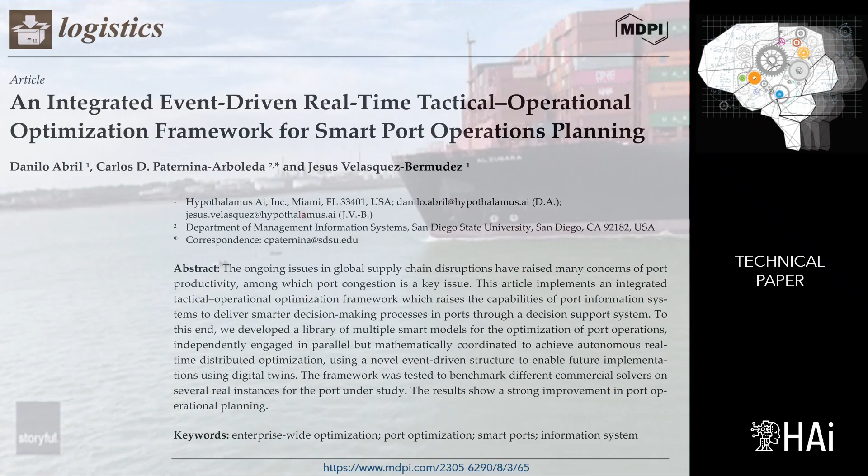The White Paper, Optimización de operaciones en puertos, contains an overview of this type of project. And the paper, An integrated event-driven real-time tactical operational optimization framework for smart port operations planning, presents an academic publication of the work.

HAi has developed the HAi Port System to optimize the decisions of companies related to the port sector and the logistics operations that must be faced: Port Operation Modeling Framework, Ports Advanced Analytics.

Port decision makers today face the problem of exploring ways to increase port capacity, which is influenced by the continued growth in the number of containers entering and leaving the port, the steady increase in the size of ships, as well as many other previously unforeseen factors.

Therefore, professionals as well as academics have become interested in port capacity management and the use of advanced analytics to support their decision-making processes. Applications can be grouped into strategic planning, business planning, operations planning, real-time scheduling of operations, productivity analysis, and asset maintenance scheduling.

Challenges faced: the port receives multiple weekly services that must be assigned to one terminal. The combinatorics of allocation possibilities is on the order of trillions of possible combinations. Before the project, the assignment was carried out manually, considering the characteristics of the ships, the itineraries of the services, and the restrictions of the docks and cranes existing in each terminal.

This assignment was made without considering optimality criteria; therefore, there was no guarantee that the established allocation would be optimal. If the terminal planner took a minute to evaluate each alternative, it was estimated that it would take millions of years to ensure an optimal response, obtained from a comprehensive enumeration.

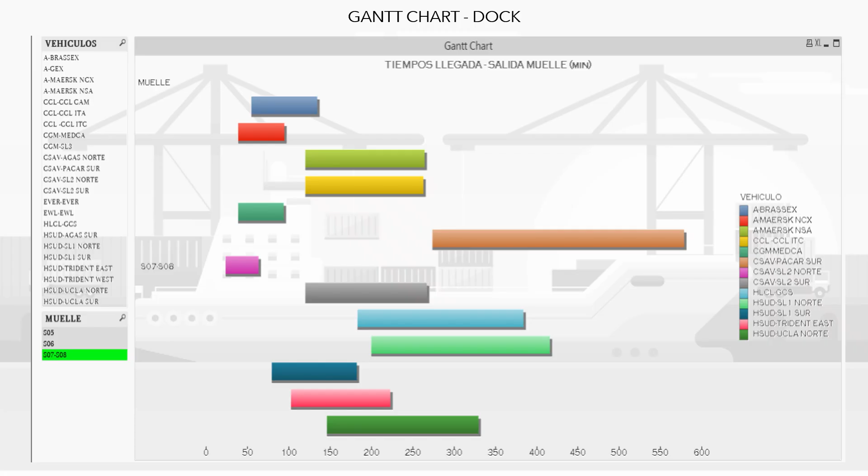The Gantt chart presents a detailed schedule, by event, continuous time, of the assignment of vessels to the docks. A port is conceived as consisting of one or multiple terminals to serve ships of different types of transport: bulk products, container ships, vehicle carriers, and cruise ships.

The main parameters that characterize the operation of a terminal are berthing lines, characterized by the distance, draft and load they can support, the storage capacity in different types of sites, yards, warehouses, tanks, silos, and the type of products that can be stored at each storage site.

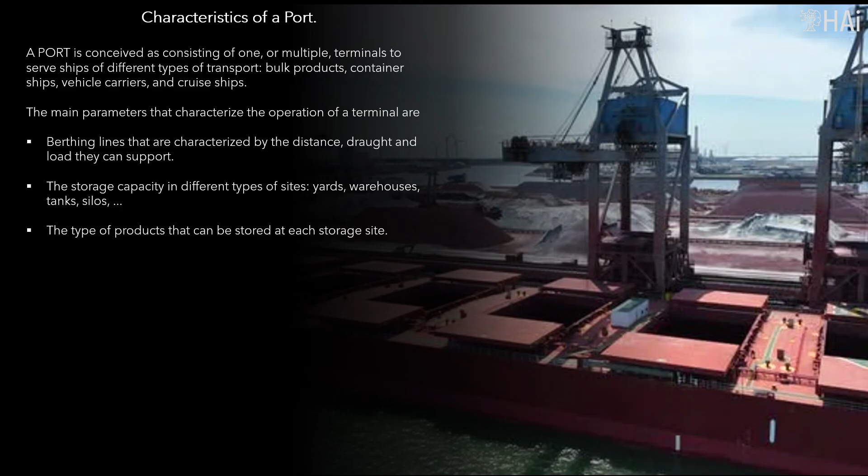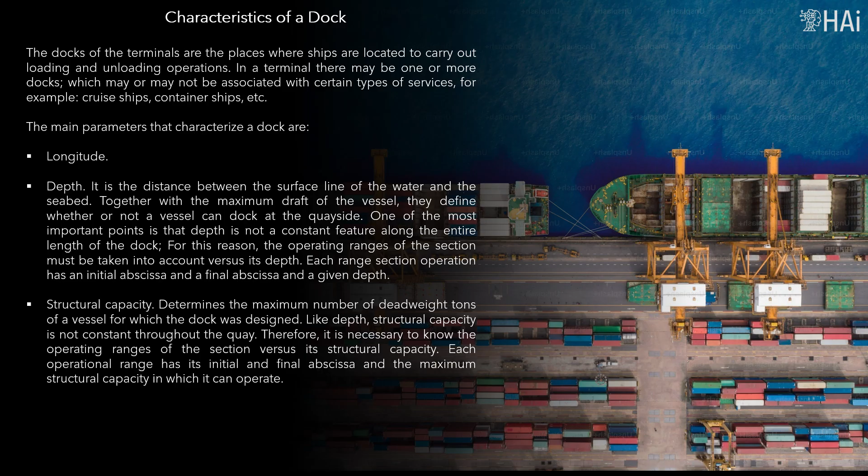In a terminal there may be one or more docks, which may or may not be associated with certain types of services, for example cruise ships, container ships, etc. The main parameters that characterize a dock are longitude, depth, and structural capacity.

A terminal is made up of multiple docks. The image shows a terminal that has two docks. Each pier can be made up of several berths, which can be of variable length. Therefore, the dock must be modeled so that the length of the berthing assignment is dynamic.

There is an operational restriction on the distance that must separate the ship from neighboring ships, and the start or end point of the berthing line. These separations can be seen in the figure.

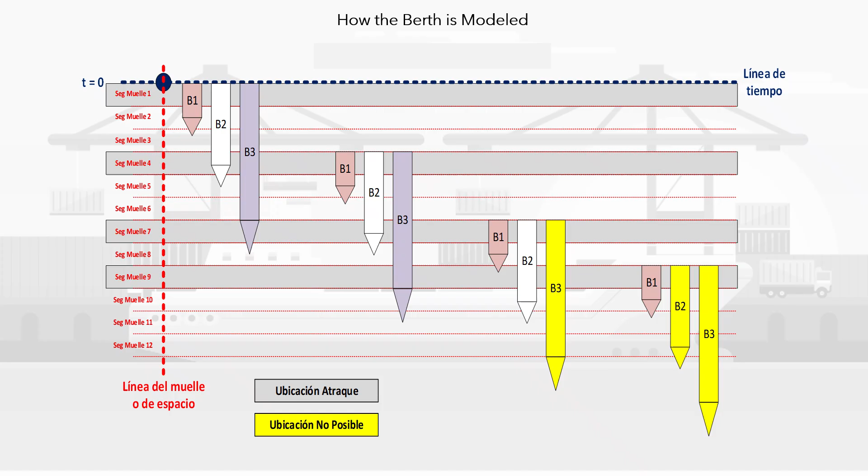The quay will be modeled using the quay segment concept, defined as a range of the quay where the depth and maximum structural capacity can be considered constant.

Terminal docks do not necessarily represent a physical or operational division; it is along the docking line, considered continuous, that ships are placed. The berthing line is characterized by its physical conditions, structural capacity, and depth, which must be considered for the assignment of a ship to a position on the line.

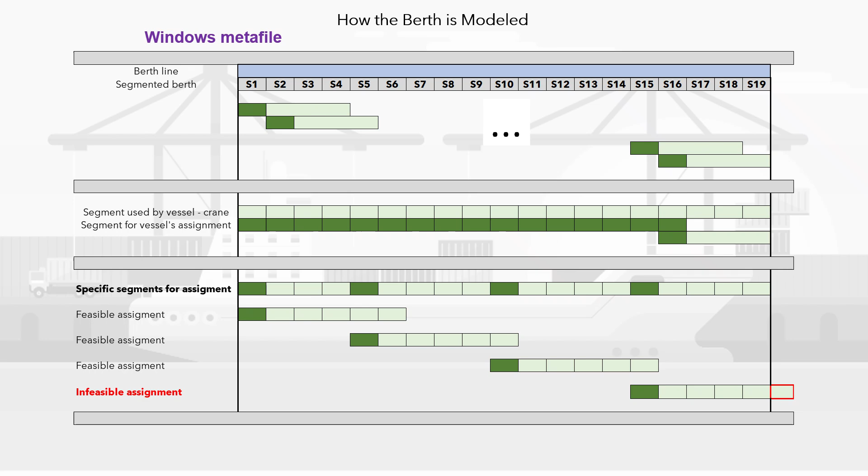The physical conditions of the berthing line are not constant along its length. For this reason, the dock must be segmented to define ranges where these characteristics are considered equal, determining a dock segment, or quay. The discretization of the berthing line, for example every 10 meters, must be defined jointly between the user and the mathematical modeler.

The cranes are responsible for the loading and unloading operation between the ship and the dock floor, for products such as containers and vehicles. Normally a port has multiple types of cranes, among which stand out mobile cranes and gantry cranes. The main features of the cranes are crane type, lifting height, seaside reach, average productivity, movements per hour, and maximum availability.

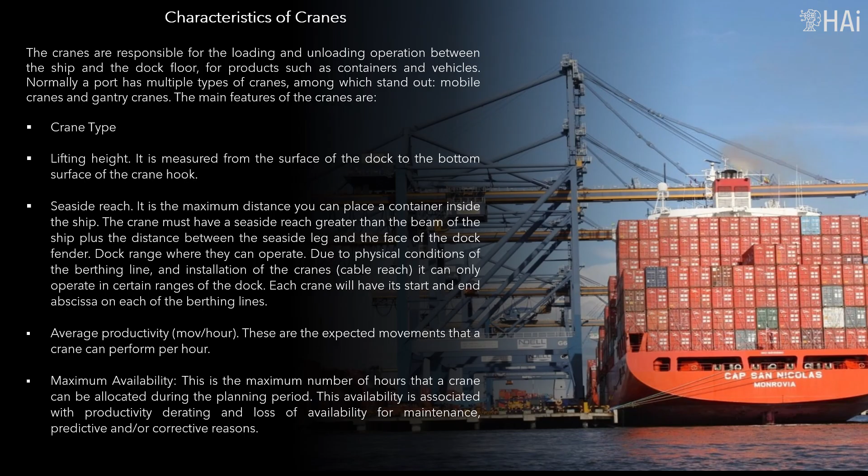Assignment of crane to model services and handling of containers. Its purpose is to produce the following specific items: a detailed schedule of the assignment of cranes to services, and container management considering their destinations.

The dock cranes are in the coastal or operational area. The transportation area supports vehicle movements, cranes, trucks and/or trains. The containers are stacked in the container yard.

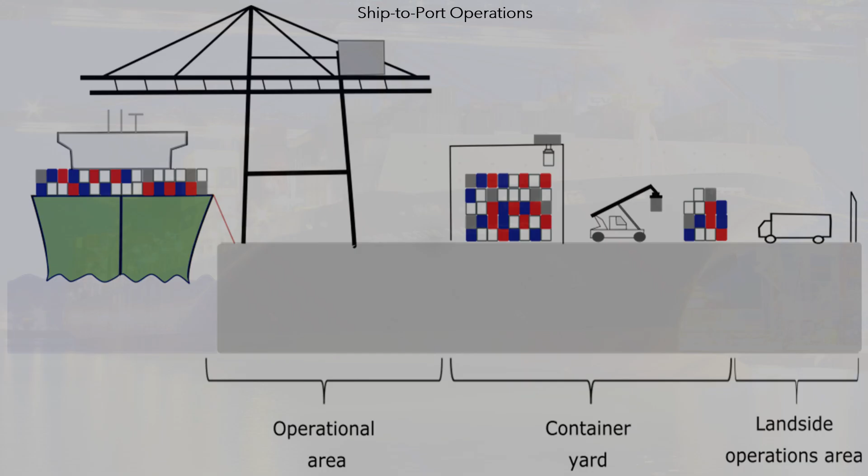Assignment of gantry cranes and mobile cranes to services. The aim is to optimize the loading and unloading of vessels and maximize the use of quay cranes. The model considers crane sequencing, choice of gantry cranes, restriction of clearance between consecutive cranes, sequence and non-overlap constraints, sharing a crane between two ships, and movement limitations for gantry cranes.

Allocation of labor to port activities. The goal is to define the HR schedule, minimizing the number of employees hired and reducing the cost of payroll. Scheduling is carried out considering the prior planning of port operations.

Assignment of containers and vehicles to storage yards. This process is carried out in two stages. Stage 1, macro yard planning. The goal is to minimize congestion in the yard for loading and unloading. The model considers optimization based on the concept of clusters, relationship to future vessel allocation, and limitations of yard cranes.

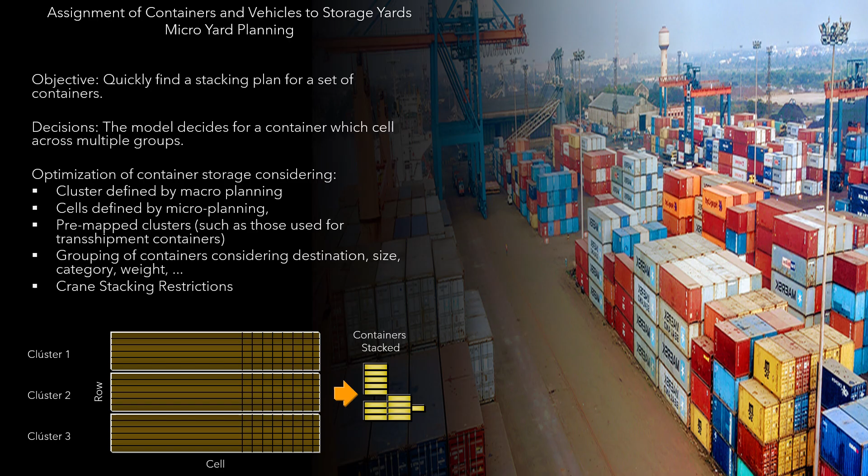Container and vehicle movements between ships and berths. The goal is to assign the container to the crane as close as possible. The constraints of the model are: handling the loading sequence between the shipyard and the vessel, location of containers and vehicles considering planned future movements, restrictions on cranes, clusters, and overweight and stability on ships.

Real-time decisions are: what slot on the boat, and which cluster to pick up in the yard? Below, we present in detail the movements of containers between ships and berths. The dock cranes are in the coastal area. The transportation area supports vehicle movements, cranes, trucks and/or trains.

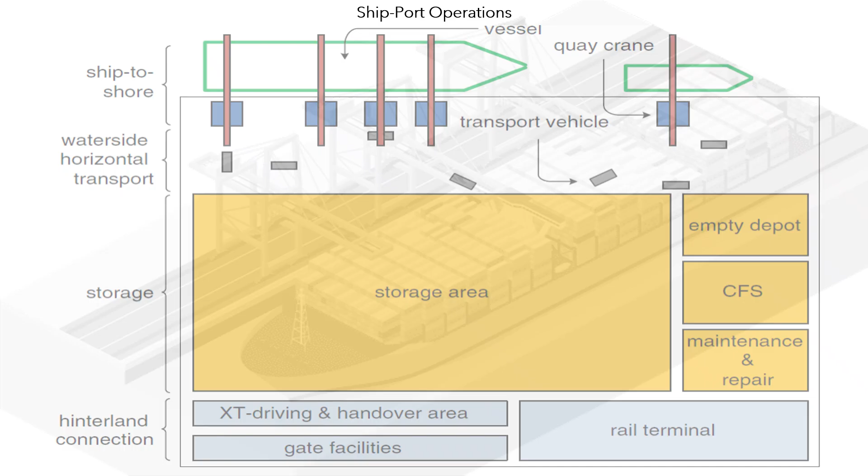The container yards are organized into clusters, composed of multiple cells. Stacks are vertically stacked container groups, and the cell map is a horizontal, ground-level organization of stacked containers. Within a stack, each container occupies a cell located at a certain height and in a specific row.

Part of the model's functions must be the stacking and unstacking of containers. To do this, the cell map is used, which has detailed information on each container, its destination or service, and merchandise.

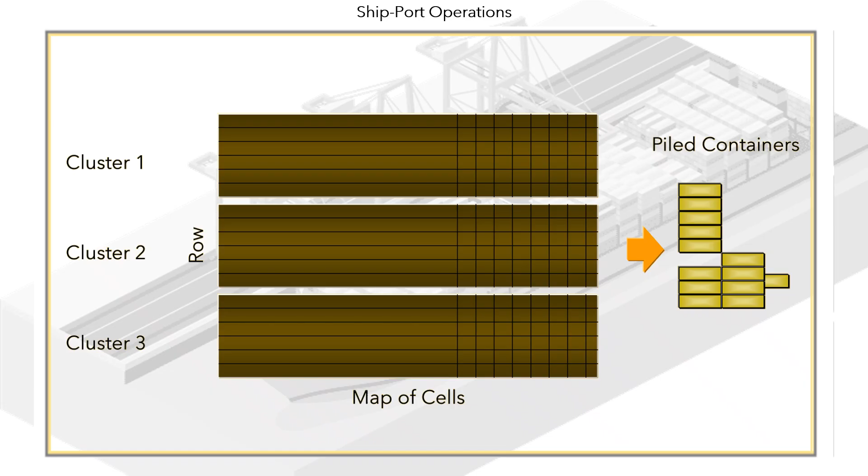The model calculates all the movements that must be made with a container until it leaves the container yard in a service. To do this, it must be ensured that the loading time on the ship is within the ship's time window, and that the position of the container on the ship complies with the specifications given by the shipping company. The storage on the ship can be simulated as another storage area, like those available on land.

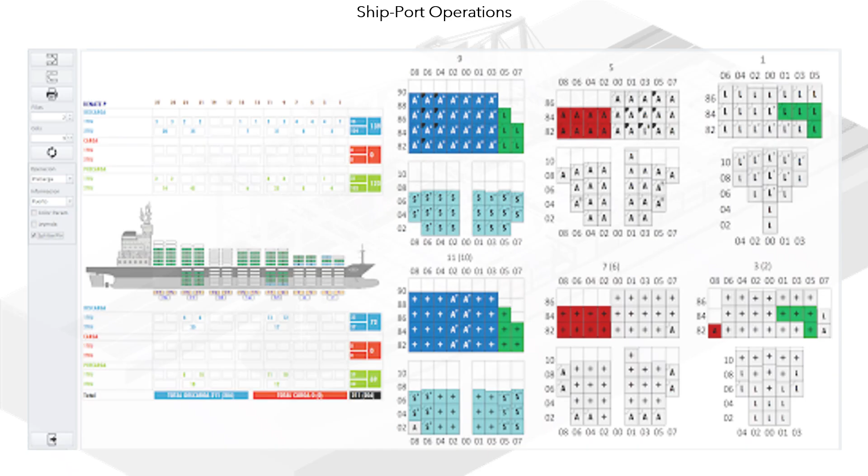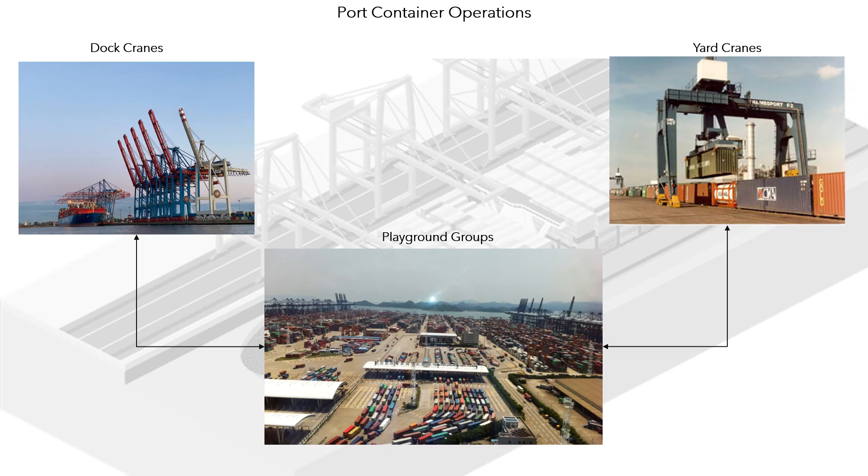This work can be carried out by the port, with a ship pallet planning system, or by the ship with its own systems. The container transfer operations at the port are: transfer between the coastal area and the container yard, using the ship's cranes and gantry cranes; transfers within the storage area, using yard cranes; and transfer between the container yard and the vehicles transporting containers out of the port, also using yard cranes.

Port operation modeling: physical entities.

A service is one of the many routes or itineraries offered by a shipping line. One or more boats may participate in a service. For the port, certain data of a service is relevant, starting with the service name.

Type of arrival: irregular, randomly showing up every n number of hours, or regular, showing up at a set time every n number of weeks. Regular services take precedence over irregular ones. Deviation: if the service is regular, the deviation is a probability distribution indicating the number of hours a service can be advanced or delayed; if irregular, it indicates the number of hours between arrivals.

Movements: a probability distribution indicating the number of containers, vehicles, or tons embarked and disembarked per arrival. Minimum productivity required is the number of movements per hour that the port must guarantee to the service.

The main characteristics of the service are: name of the service, type of arrival (regular or irregular), and type of boat. Ships are the entities that transport cargo.

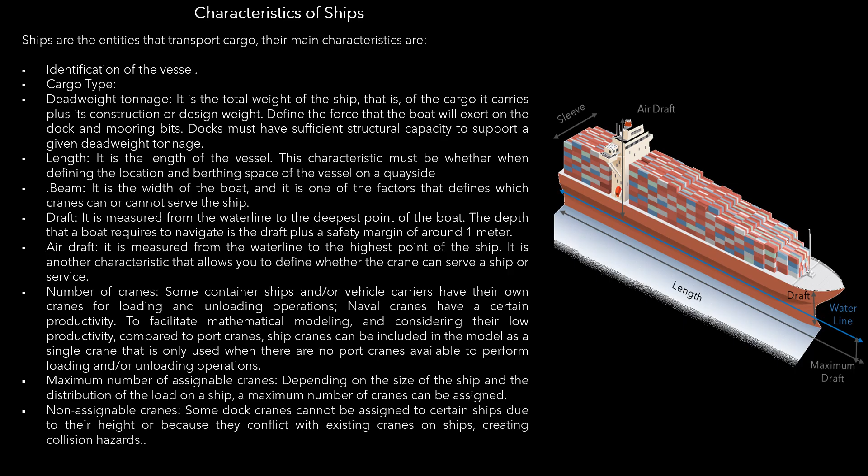Their main characteristics are: identification of the vessel, cargo type, deadweight tonnage, length, beam, draft, air draft, number of cranes, maximum number of assignable cranes, and non-assignable cranes. Next: container transfers between terminals.

Some containers that are unloaded are in transit and have to be reloaded on other ships to other destinations. Agreements exist between shipping lines for a certain number of transit containers to be dropped off by one line at the port and then picked up by another. Therefore, if one line arrives at one terminal and the other line arrives at another terminal, a transfer will be generated, the cost of which normally must be borne by the port.

In addition to ships, many ports must consider barges, which are vessels dedicated to the transport of transshipment products, containers, and vehicles that must be mobilized between port terminals. Like any other ship that covers a service, barges make use of berthing lines and cranes.

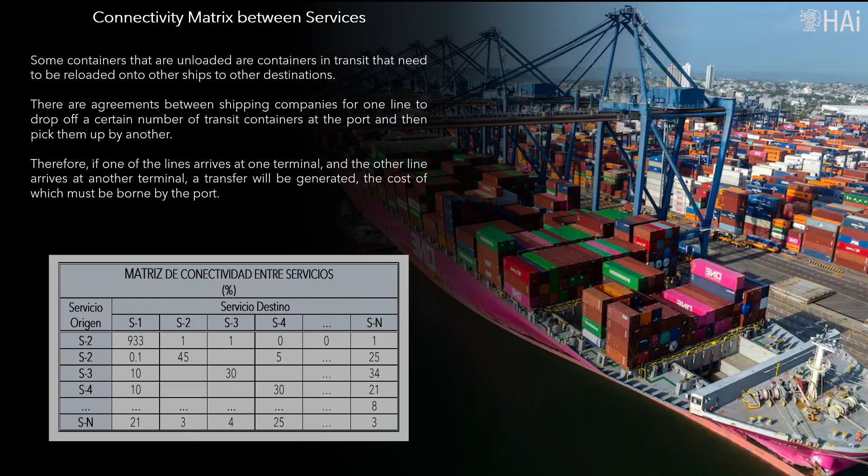The service window defines the time between the expected date of arrival and the expected date of departure requested by the shipping line for attention in the port. The service window is divided into several times: reserve time, docking time, preparation time, operating time, closing time, departure time, early arrival date, late departure date, and time window slack.

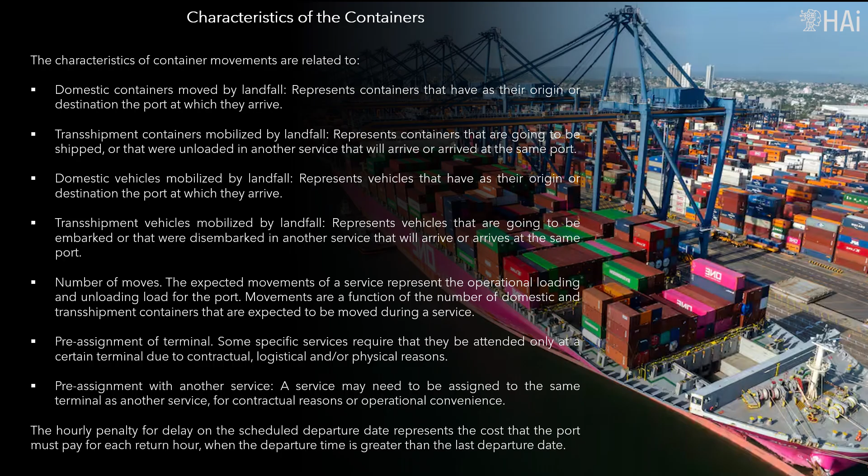The process of accepting a new service at the port's terminals begins with a request by the shipping companies, which provide the port with the following information: number of expected moves, frequency of service (weekly or biweekly), day, expected time of service arrival or time window, and physical characteristics of the type of vessel that will provide the service.

Based on the information provided by the shipping company, and the current assignment of services to terminals and docks to ships (firm commitments), the commercial area, supported by the operations area, analyzes whether it is viable to provide this service in the port facilities.

To accept a new service, it is important that the port can negotiate minor changes in the service window with the services already in place. Although within the negotiations there is a permitted slack, plus or minus X hours, in the service window, this should not be included in the process of assigning services to terminals and from ships to docks.

There are some services that have pre-scheduled appointments, for example the passage through the Panama Canal, so the slack in the departure time must be zero.

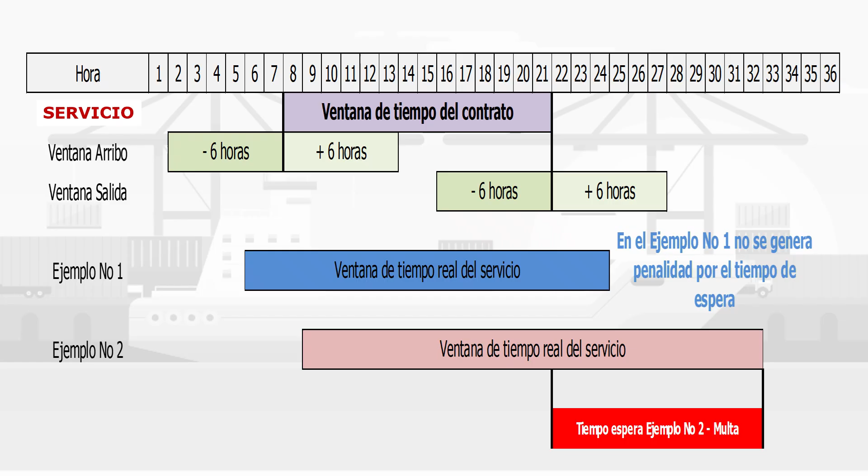The hourly fine for non-compliance with the timeout of the time window has an average cost in US dollars. The fine depends on many factors and it is not possible to settle it in the same way for all shipping companies. In many cases it is contractually fixed.

The vessel's service operation begins the moment the ship arrives at the buoy point. The duration of these activities is measured in hours.

From this point on, the ship is steered by a practical pilot from the harbor pilotage company under the approval of the ship's captain. This first operation ends when the ship arrives at the geographical point where the docking maneuver begins. Next comes the docking operation, which consists of the location or parking of the ship in the section of the dock that has been assigned to it for the unloading operation.

The next sub-process is service preparation, which consists of reviewing the documentation and its initial inspection. After the preparation comes the loading and unloading activity, which is the operation itself.

In this activity, the ship has the necessary number of cranes for the necessary time, to comply with the minimum productivity of movements committed to the shipping company, allowing the ship to set sail respecting the time window stipulated in the commercial negotiation. During the time of operation, all the activities necessary for the movement of containers to and from the port storage yards are carried out.

Next comes the closing activity, which in spirit and time is similar to the preparation activity. Finally, after the closing activity, the boat can set sail.

For all activities, except for the operating activity, there are estimates of the expected times with very low variability, and therefore they are taken as constants according to the suggestion made by the port. The calculation of the operating time is complex, as it depends on the resources and/or cranes assigned to the vessel, as well as the duration of their assignment.

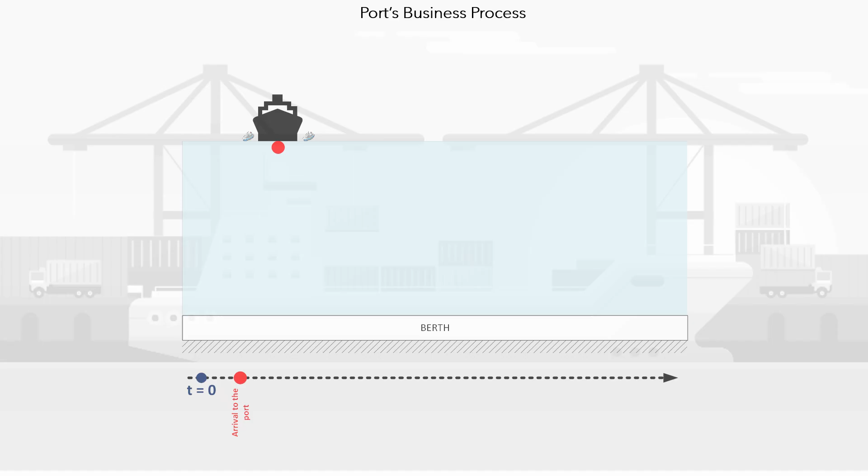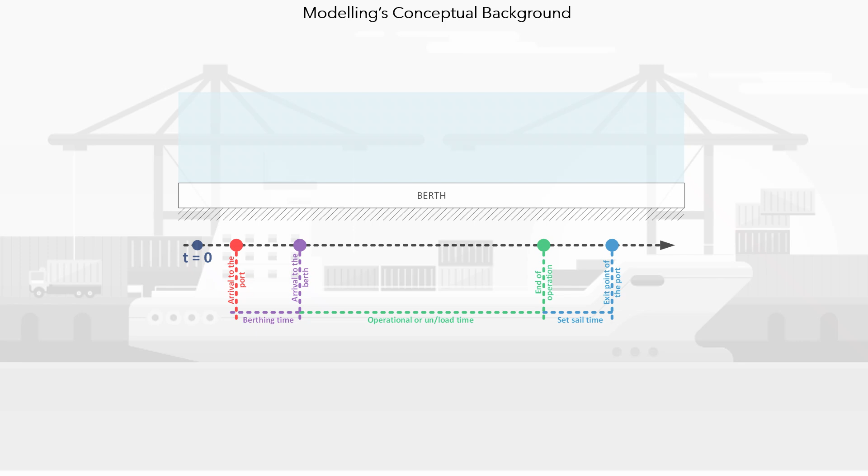The problem is formulated using an event-based approach. An event is any situation or milestone that changes the current state of the system. In this formulation we have two ship events: when a ship arrives at port, and when a ship leaves port to continue its journey.

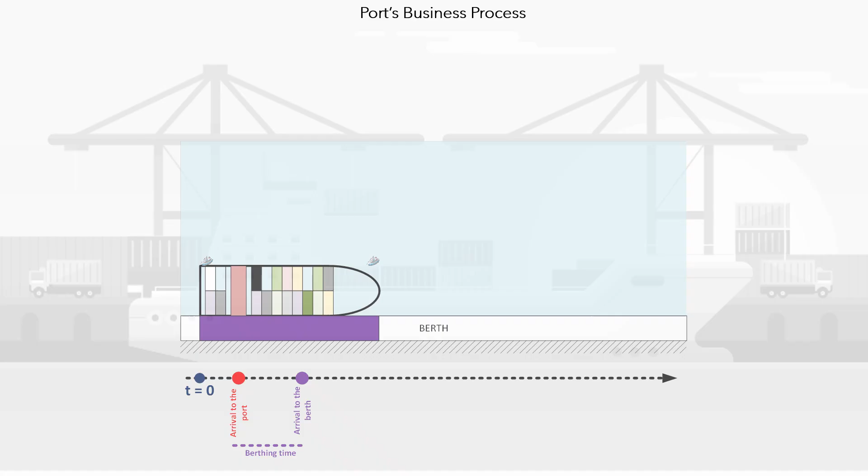The port's business process may be represented by the referenced events: first, arrival at the port; second, arrival at the berth; third, end of berthing operations and exit from berth; fourth, departure from the port.

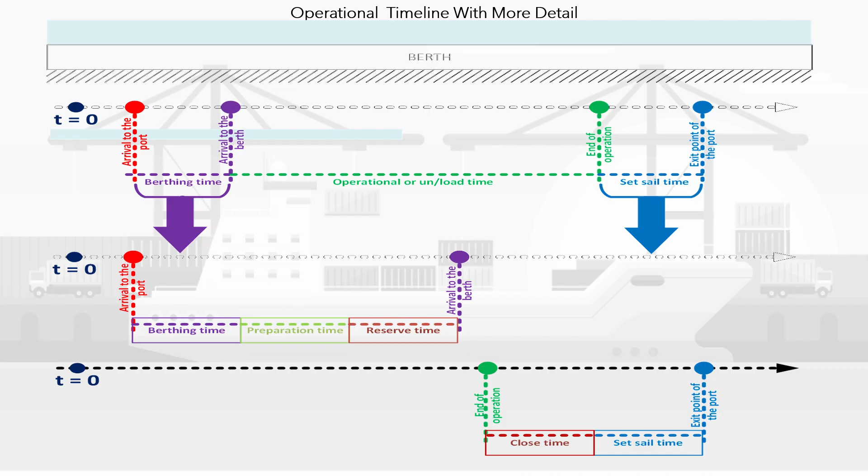The operational timeline can be viewed in more detail. The image shows the period of operations at the berth, the variables in the model and how they relate, and the equations in more detail, ready for implementation.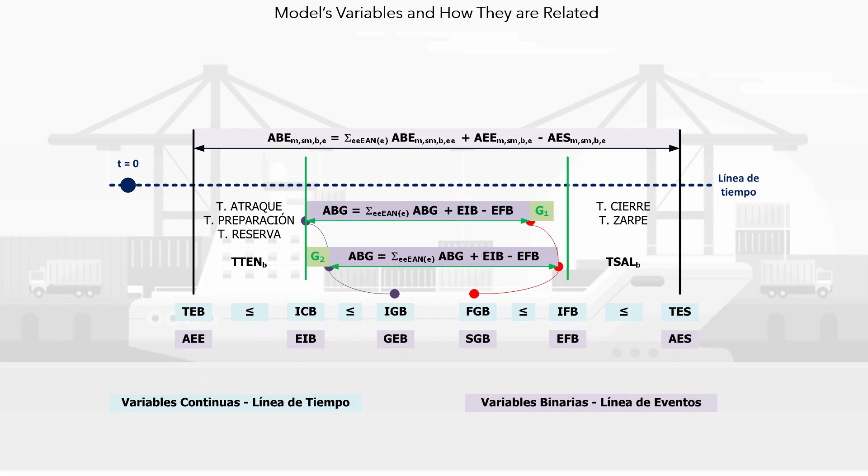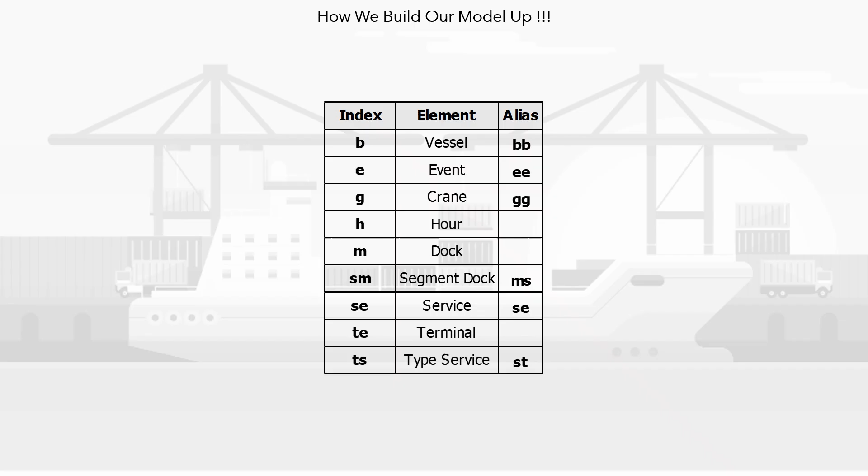Indices represent the entity and all algebraic elements of the model. Below are some groups of equations in the model.

These equations describe events that occur over time, set as the occurrence events timeline. This inequality ensures that all events have a different instant of occurrence on the timeline. The EPSI value ensures we avoid degenerate solutions, which slow down the speed of the model.

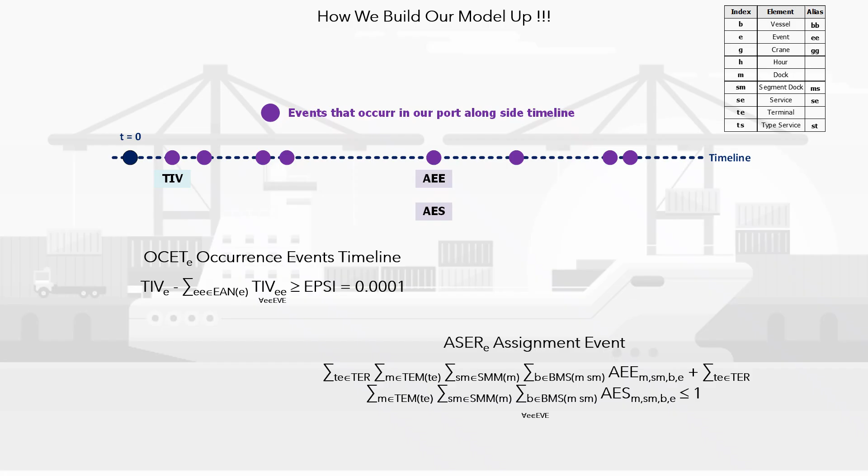ASER, the assignment event: the event can only be assigned to one of the event types that can change the state of the system—entry or exit of a ship, value of 1, or no change in the state of the system, value of 0. As model preprocessing, the model must calculate the events that can occur in a run.

In this way, there is an exact adjustment of the events, and impossible events are not generated. The process to follow is: first, order all vessels based on expected arrival, FEBS, and departure time, FSBS.

Second, add 1 to the number of cranes to include the vessel-related entry and exit event. Third, calculate the cumulative number of events up to the nth event, inclusive. Fourth, the events assigned to the vessel are those between the cumulative events of FEBS and FSBS.

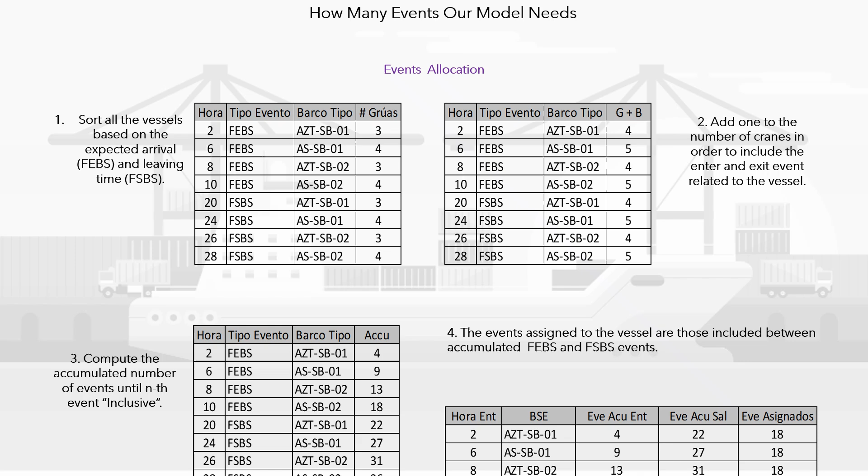These equations describe the vessel events allocation. ABEE, B input assignment vessel to events. It ensures that the entry event of vessel B is assigned only once, considering the possible alternatives of the tuple: dock, dock segment, and event.

ABES, B output assignment vessel to events. It ensures that the exit event of vessel B is assigned only once, considering the possible alternatives of the tuple: dock, dock segment, and event.

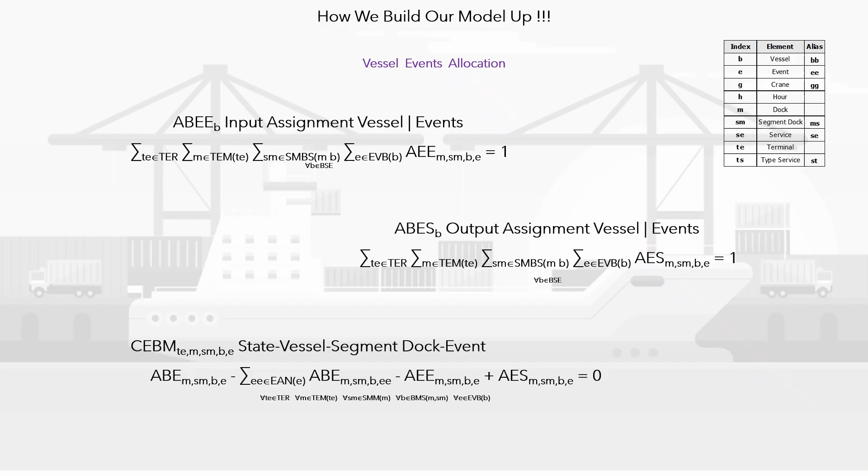CEBM, TE, M, SM, B, E - state vessel segment dock event. This equation allows the coordination of the state of the ship dock berth segment assignment between two consecutive events.

These equations describe the allocation vessel to segment dock. ASBM, the allocation vessel to segment dock. It ensures that vessel B is assigned only once to a berthing segment SM of the docks where the vessel can dock. CBSTE, TE, M, SM, B input time coordination segment dock and vessel.

It ensures that the variable TEB, M, SM, B can take a positive value if and only if the vessel B has been assigned to the dock segment SM, of dock M, which occurs when ABM, M, SM, B equals 1.

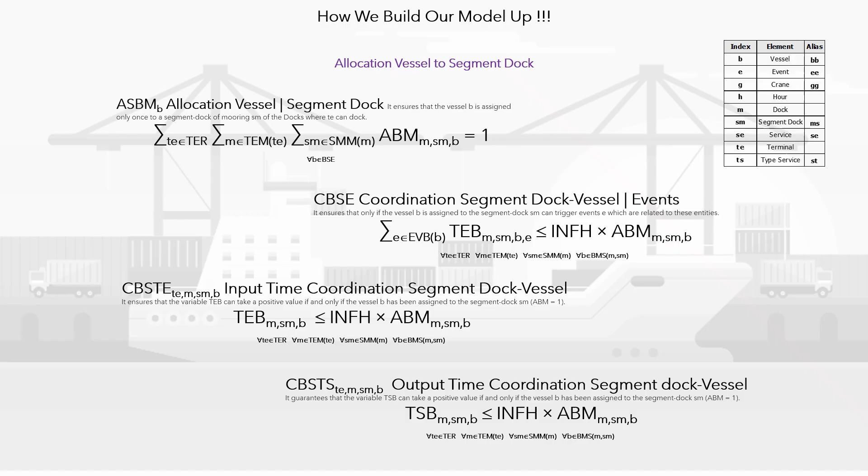CBSTS, TE, M, SM, B output time coordination segment dock to vessel. It guarantees that the variable TSB, M, SM, B can take a positive value if and only if the vessel B has been assigned to the segment dock SM, which occurs when ABM, M, SM, B equals 1.

End operation. We use the same idea to define the TSB, M, SM, B variable for each vessel. The two equations guarantee the synchronization of the event E with the tuple: dock, dock segment, and event, for the variables TIV, E and TSB, M, SM, B.

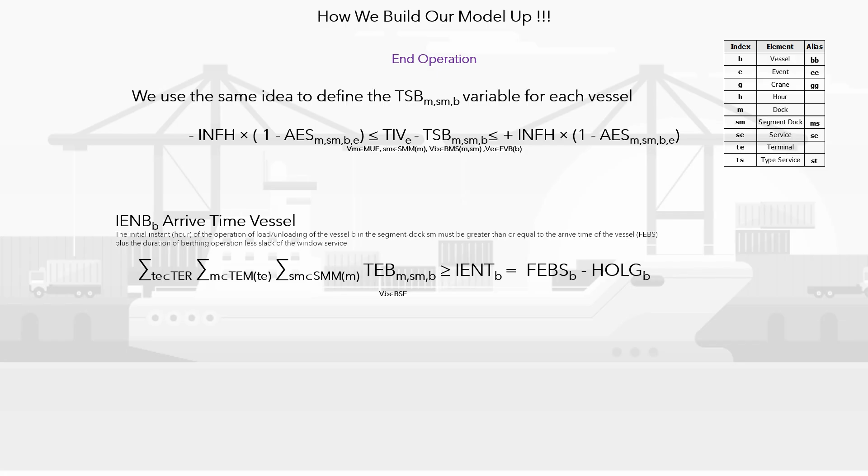FSBC, B instant completion of service vessel containers. It determines the moment of completion of the service for vessels carrying containers.

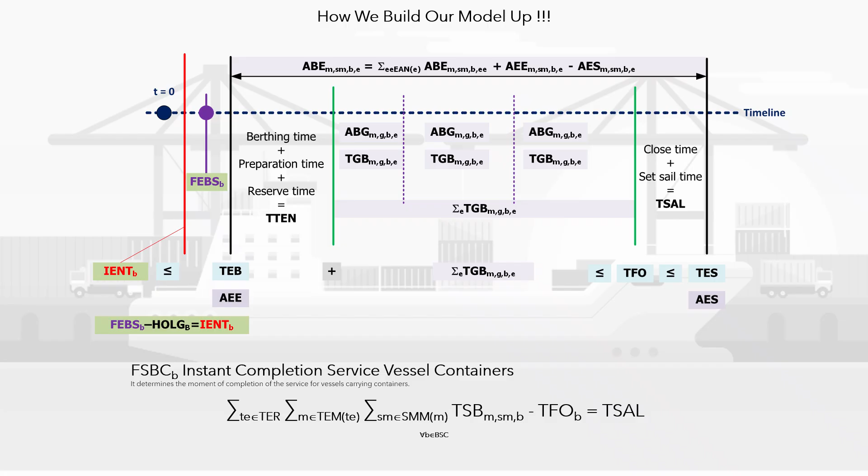These equations control the running time of a crane between events. CTBG, TE, M, G, B, E coordination operation time crane vessel event. It allows the variable TGB, M, G, B, E, operating time, take values greater than 0 only when crane G is in operation the vessel B in the event E.

The same concept used to define the TEB, M, SM, B and TSB, M, SM, B is used here to determine TGB, M, G, B, E for each crane vessel combination.

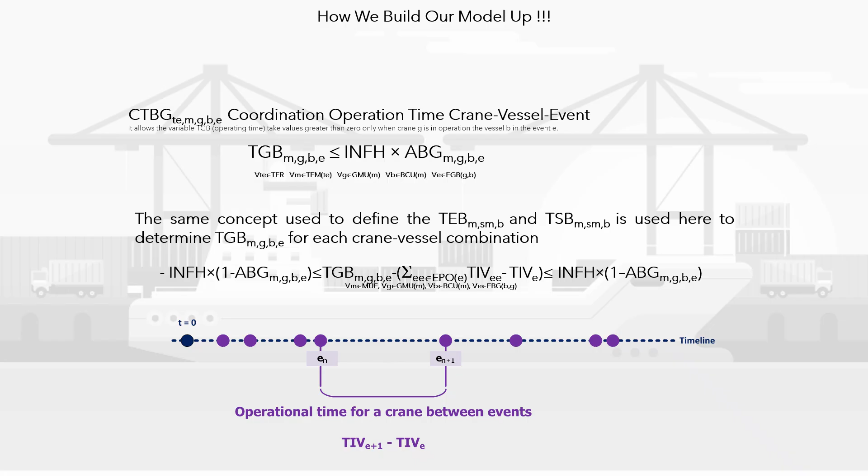To solve the model, in 2016, it was decided to divide the problem to solve it in parts. This was agreed with the end customer. The first model is the terminal service assignment model and solves the problem of assigning ships to terminals. It includes the estimation of the costs of transshipments.

The second model, the terminal activity scheduling model, is executed independently for each terminal, considering as a boundary condition the assignments made in the first model. These models, which are the most time-consuming to solve, can be run in parallel.

HI and SPRC recognize that this approach provides a suboptimal solution in close proximity to the optimal solution. The experiments carried out showed that the optimality gap in many cases was 0. Within the squares, the variables as they were divided in the two models are indicated.

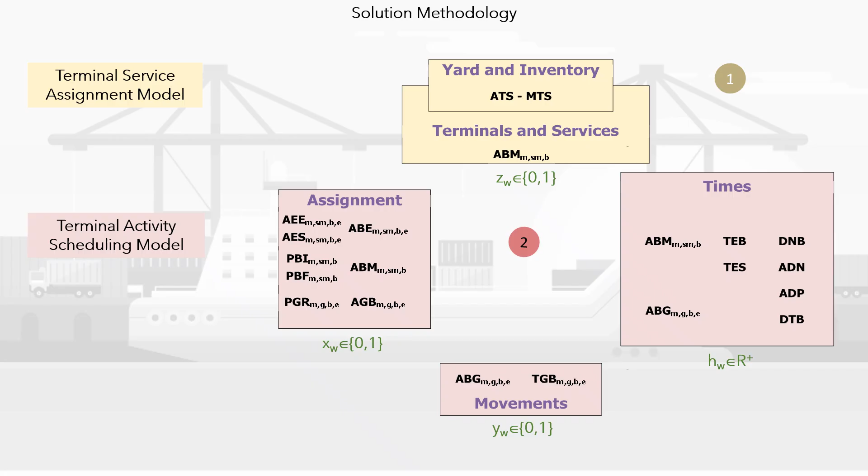Inputs. All mathematical models share a single data model, making it easy to interconnect models along the decision-making chain.

Below are some shell windows containing the tables of the Hyport information system. The screenshot presents an Optex Explorer of the elements of the Hyport information system.

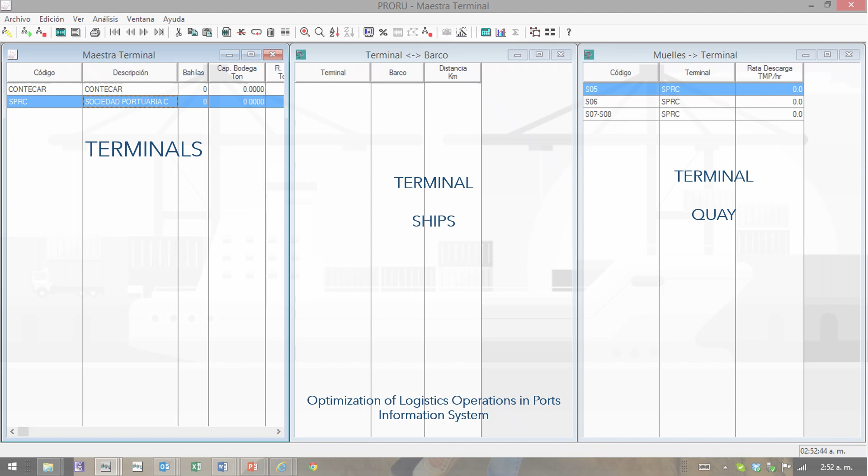The shell window contains the master table of terminals, and the tables of relationships between the terminals and ships, and quays. The shell window contains the master table of quays, and the tables of relationships between the quays and terminals,

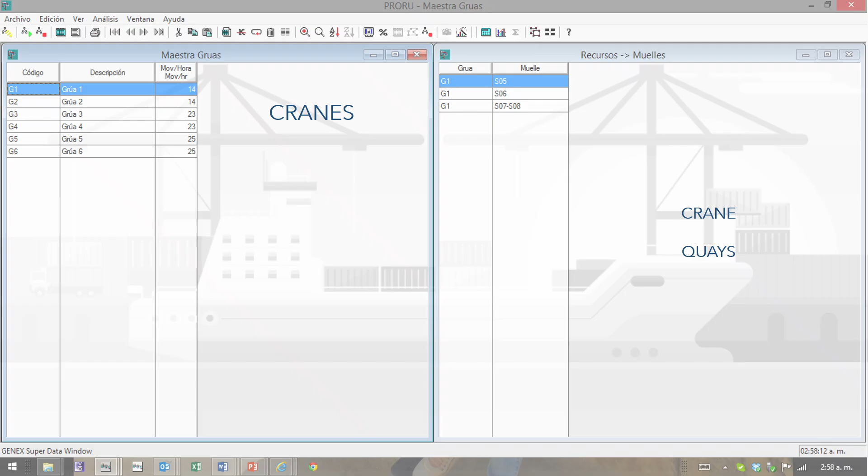cranes, and ships. The shell window contains the master table of cranes, and the tables of relationships between the cranes and quays. The shell window contains the master table of ships.

The shell window contains the master table of ships, and the tables of relationships between the ships and terminals, and quays.

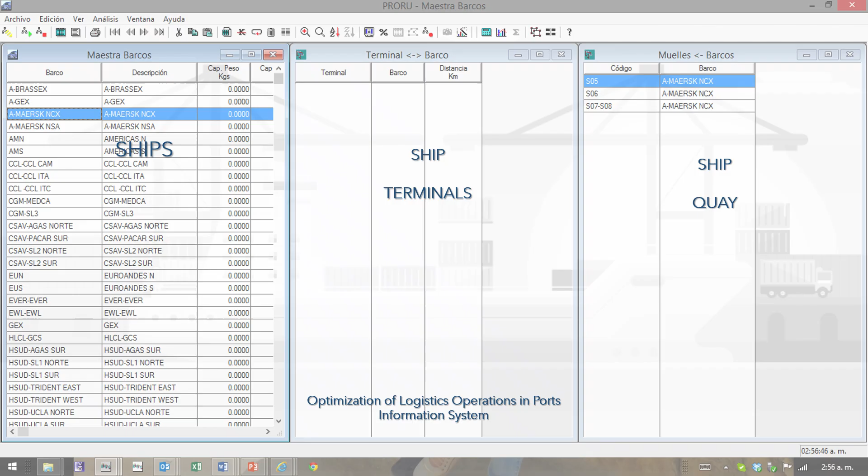Outputs. Below are some shell windows containing the results tables of the models of Hyport. The screenshot displays an Optex Explorer of windows for the output of a model.

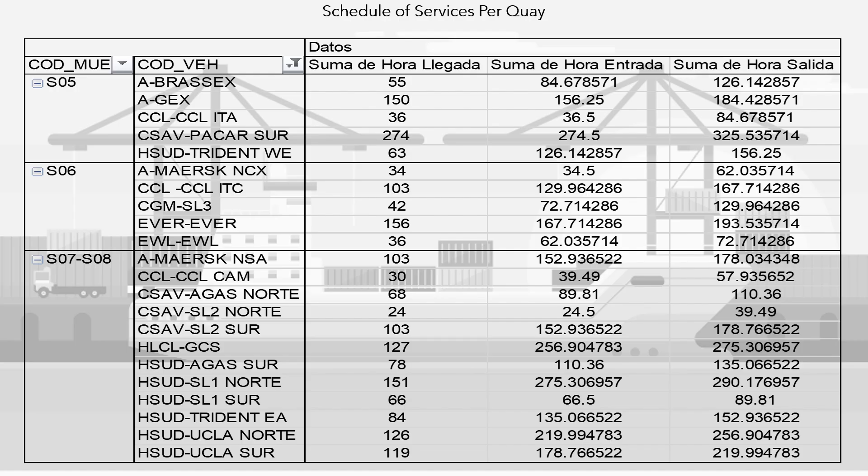The selected table points to the variable time of entry of the ship to the dock. The image presents a selection of a pivot table in Excel with the schedule of services per quay.

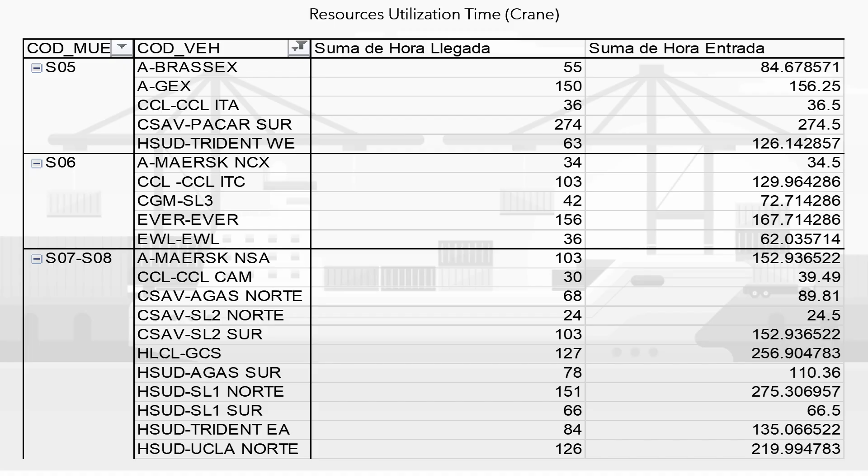The image presents a pivot table with the crane utilization time per service.

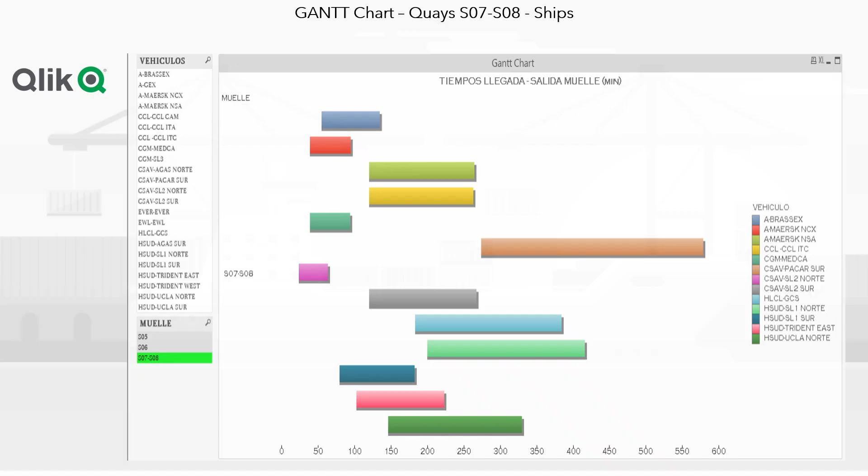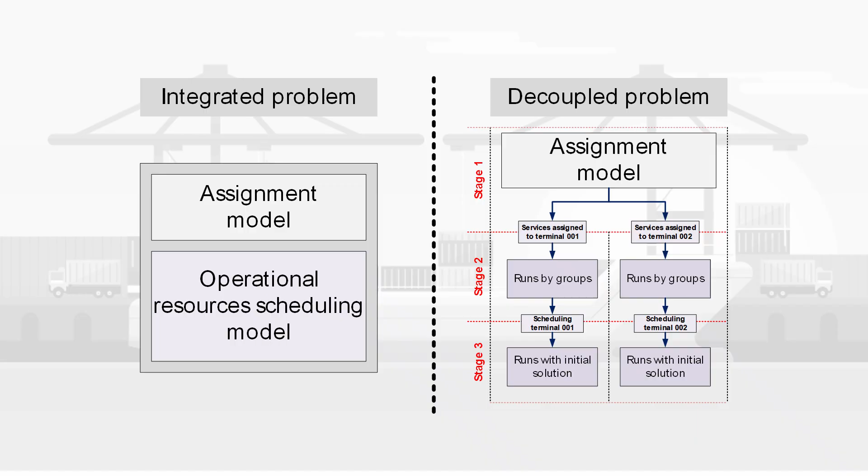Sliding optimization. There are two alternatives for port modeling: integrated, applied to small ports or terminals, and decoupled, that is required for large ports or terminals.

Then, the methodology to achieve the solution of the port assignment problem considers two steps: planning of the assignment of services to terminals, and programming of service care. For small ports, the solution of the integrated, monolithic, problem may be an alternative to consider.

For large real-world cases, planning decisions in a monolithic algorithm may be very complex for the best mathematical programming solvers, such as Gurobi, CPLEX, Xpress. Partitioning and decomposition issues prepare the compute environment to use parallel optimization, reducing solution time and memory requirements.

The proposed partitioning and decomposition scheme involves two types of problems: a coordinator related to the assignment of services to terminals, and W subproblems, each of them related to the terminals that make up the port.

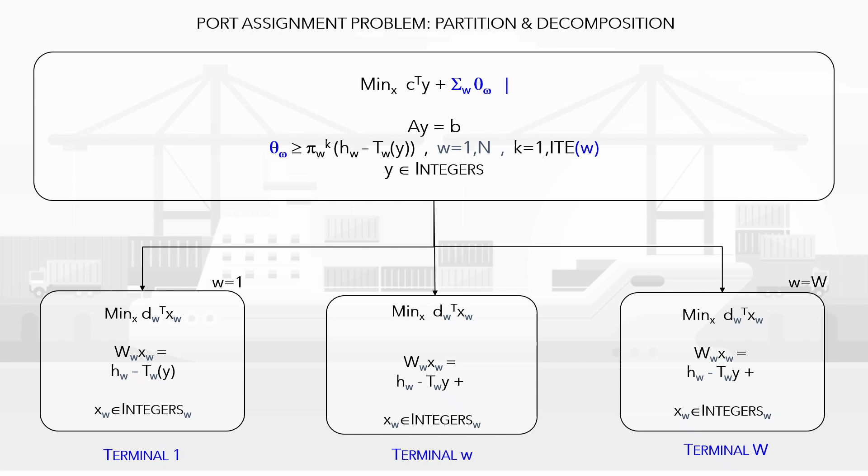If deemed appropriate, an additional level of partitioning could be generated related to the docks that make up each terminal. All the problems involved are of the MIP, mixed integer programming type.

To solve the already partitioned problem, there are two alternatives: math heuristic empirical coordination, and exact mathematical methodology based on Benders partition theory, modified to solve integer subproblems.

In the first version of HAI-PORT, the coordination is math heuristic — heuristics based on mathematical programming approximations. In this case, a mathematical heuristic called sliding optimization was used.

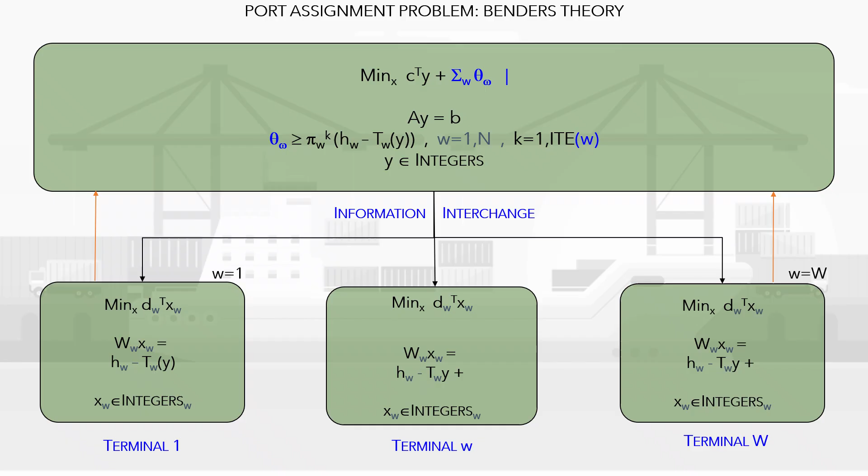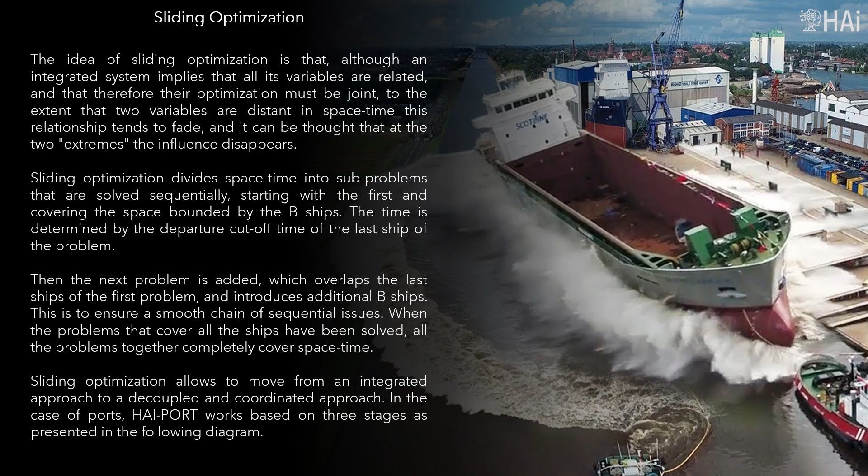The idea of sliding optimization is that, although an integrated system implies that all its variables are related, and that therefore their optimization must be joint, to the extent that two variables are distant in spacetime, this relationship tends to fade, and it can be thought that at the two extremes the influence disappears.

Sliding optimization divides spacetime into subproblems that are solved sequentially, starting with the first and covering the space bounded by the B ships. The time is determined by the departure cutoff time of the last ship of the problem.

Then the next problem is added, which overlaps the last ships of the first problem, and introduces additional B ships. This is to ensure a smooth chain of sequential issues. When the problems that cover all the ships have been solved, all the problems together completely cover spacetime.

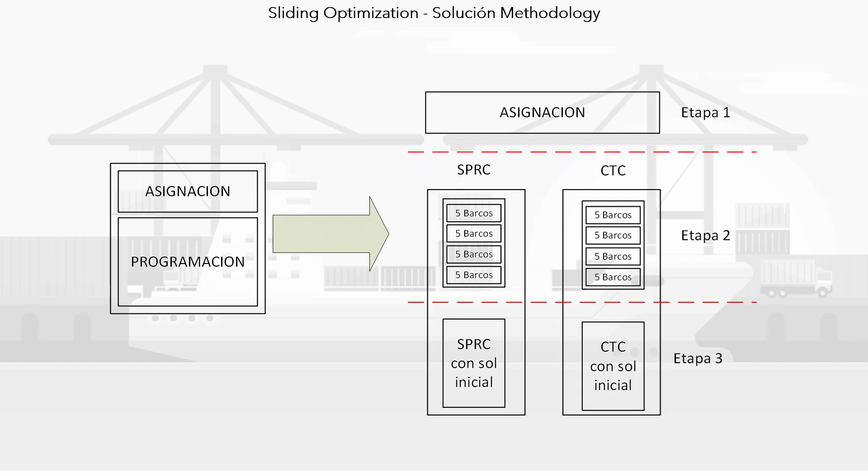Sliding optimization allows to move from an integrated approach to a decoupled and coordinated approach. In the case of ports, HAI-PORT works based on three stages as presented in the following diagram. The steps to follow are described below.

To carry out the programming of a terminal, the first N services are taken according to the expected date time of arrival at the port.

With this subset of services, HAI-PORT gets a schedule that minimizes the departure time of the last ship within the N scheduled ships, which guarantees that for the following services the greatest amount of time is available for its programming, which facilitates the feasibility of the problem.

The value of N is determined empirically based on knowledge of the behavior of the system.

Setting as a border condition the programming of the first N services to be attended, the programming of the following N services is carried out, including the last M services that were already pre-programmed. The value of M is determined empirically based on knowledge of the behavior of the system. It must be less than N.

The process ends when all the SK services of the terminal have been scheduled and stage 2 ends. As a result of stage 2, a feasible initial solution to the programming problem has been created, close to the optimal solution of the problem, and this allows the algorithm to move to stage 3.

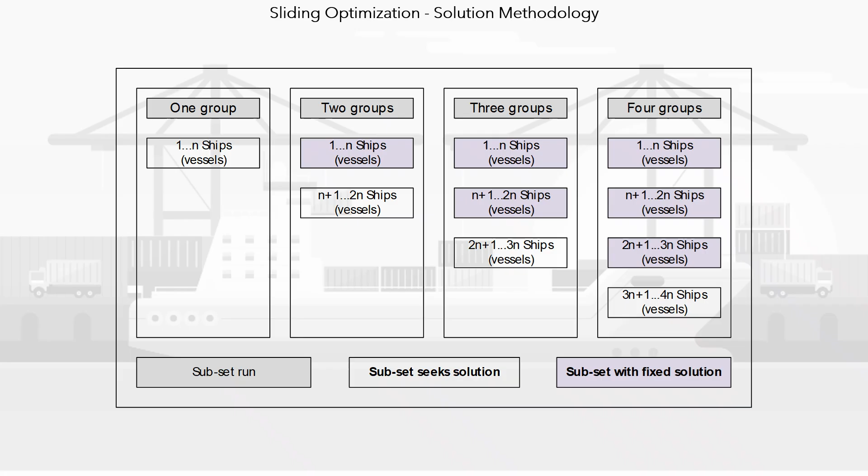In stage 3, HAI-PORT proceeds to run the integrated optimization for all the services that have been assigned to each terminal. The feasible solution built in stage 2 is provided as an initial solution to the problem solved in stage 3, which is not identical to the model used for creating the initial solution, due to the following differences. The first consists of a set of additional constraints that measure the deviation of the windows of the services that close the planning cycle. The second is the objective function, which is to minimize the cost of the operation, including minimizing the payment of penalties for noncompliance in the service window, and a penalty for deviations from the service attention windows of the services that close the planning cycle.

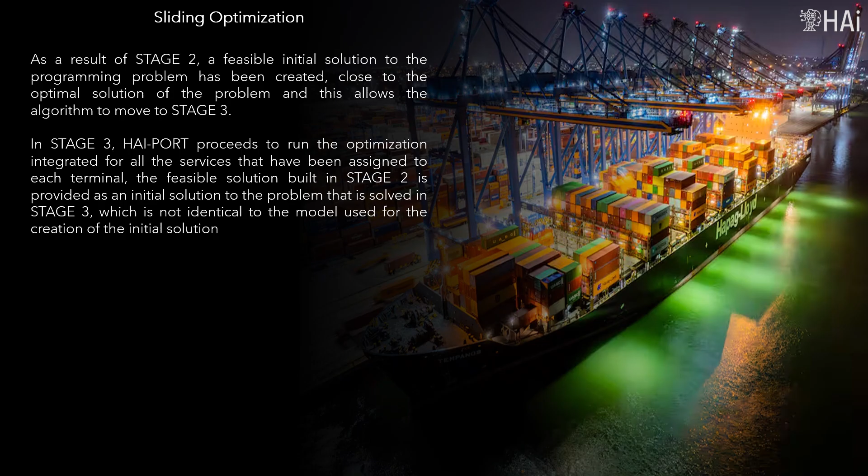As a result of stage 2, a feasible initial solution to the programming problem has been created, close to the optimal solution of the problem, allowing the algorithm to move to stage 3. In stage 3, HAI-PORT proceeds to run the integrated optimization for all the services assigned to each terminal. The feasible solution built in stage 2 is provided as an initial solution to the problem solved in stage 3, which is not identical to the model used for the creation of the initial solution.

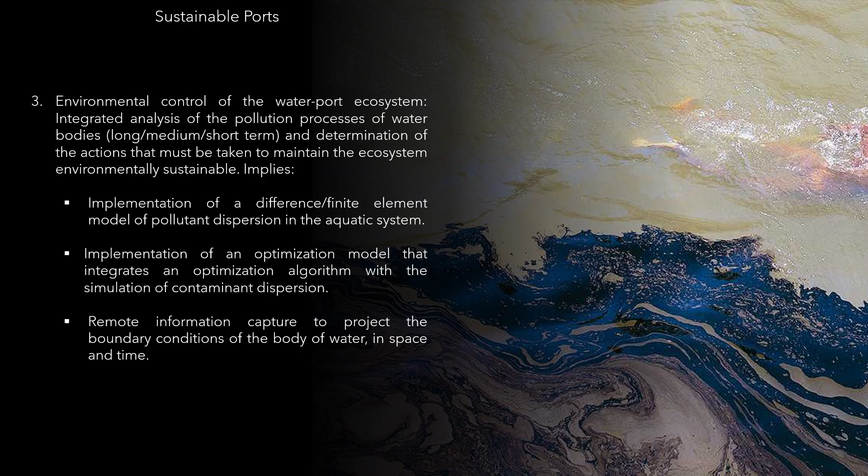Third, environmental control of the water port ecosystem: integrated analysis of the pollution processes of water bodies and determination of the actions that must be taken to maintain the ecosystem environmentally sustainable. It implies implementation of a finite elements pollutant dispersion model in the aquatic system, implementation of an optimization model that integrates an optimization algorithm with the simulation of contaminant dispersion, and remote information capture to project the boundary conditions of the body of water, in space and time.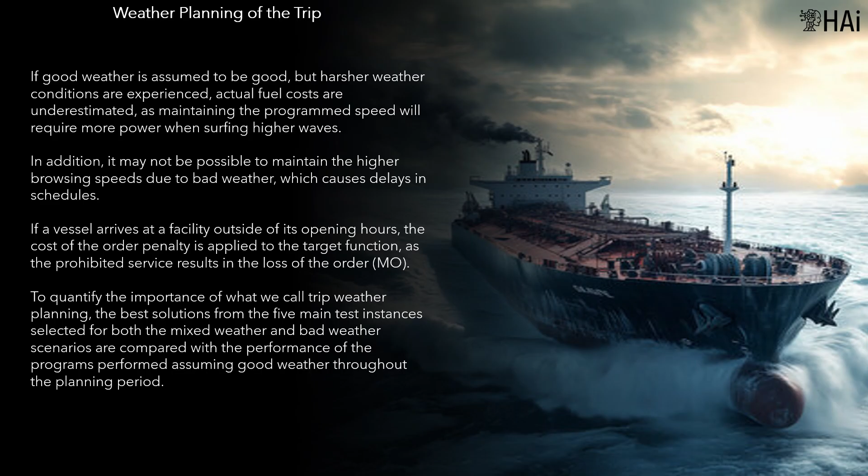To quantify the importance of what we call trip weather planning, the best solutions from the selected test instances for both mixed weather and bad weather scenarios are compared with the performance of the programs performed assuming good weather throughout the planning period. It should be borne in mind that, from the point of view of fuel consumption, the efficiency of an engine is not given at the maximum of its power.

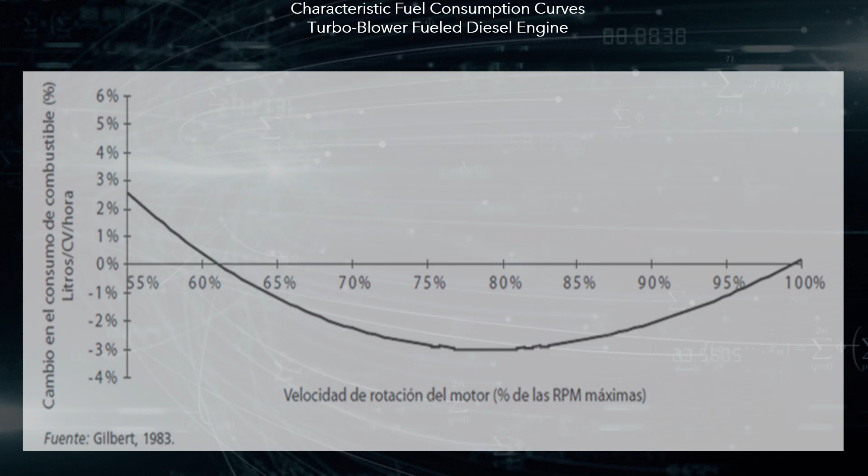The minimum unit cost per RPM is close to its maximum capacity, in the graph 80%. From that point on, as the ship's speed decreases, the amount of fuel consumed per unit of displacement increases. If RPMs increase above optimal capacity, the unit cost increases exponentially. On the other hand, these curves change depending on the weight of the boat and specific sea conditions.

This behavior is independent of the size of the ship. The graph presents the fuel consumption curves as a function of the ship's speed. There are 5 curves, for different revolutions per minute, which are related to different blade pitches. The exponential nonlinearity is evident.

Energy savings in train control optimization. The need for a clean environment is based on a rational consumption of energy. This covers all industries, and in general all human activities. Optimal train travel speed planning involves mathematical modeling, to minimize energy consumption, when the train has a predefined maximum arrival time.

First, it must be considered that all industrial processes are variable speed, and that energy consumption, depending on the speed of the process, is nonlinear, it is exponential. This implies that, in the absence of economies of scale, the regulation of the speed of industrial processes is fundamental in the process of controlling energy consumption. Production facilities do not have a defined capacity, it is set according to the speed of the process, and the time that this speed lasts. That is a decision variable of industrial operations.

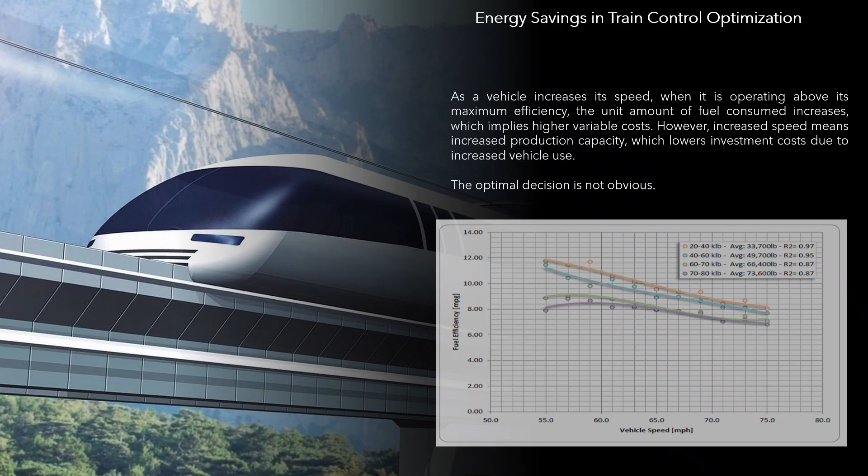Truck speed modeling is very important in long-range travel. In state-of-the-art cargo transport vehicles, the engines are electronic, digitally controlled, with telemetry capacity from the nearby environment. This autonomous capability may be called optimal short-range control. However, there is another level of vehicle operations planning that is long-range, and related with the total journey. The problem of optimizing energy consumption, gasoline, diesel, natural gas, propane, or electricity, is complicated because the energy function is nonlinear, and depends on factors that are the result of the decision-making process, such as the load and the position of the truck in any moment.

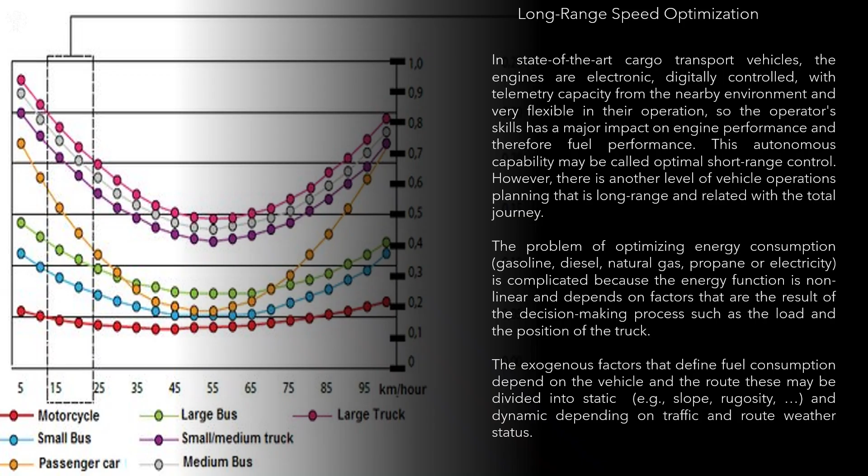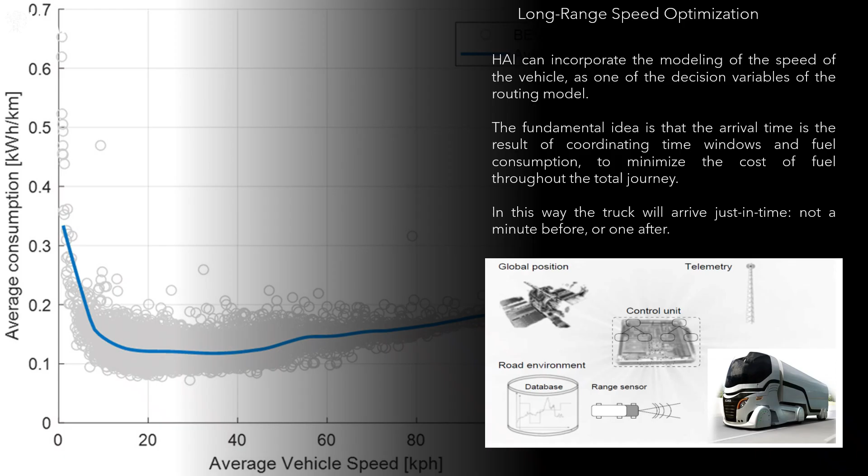Additionally, there exist exogenous factors that define fuel consumption, depending on the vehicle and the route. These may be divided into static, for example, slope, rugosity, etc., and dynamic, that depend on traffic and route weather status. HAI can incorporate the modeling of the speed of the vehicle as one of the decision variables of the routing model. The fundamental idea is that the arrival time is the result of coordinating time windows and fuel consumption, so as to minimize the cost of fuel throughout the total journey. In this way, the truck will arrive just in time, not a minute before or one after.

Emissions estimation in multimodal transportation. Ports play a key role in fostering the growth of trade and national and international economies. As ports continue to expand in size and capacity, the impact of their operations on air quality and climate change becomes increasingly significant. While nearby regions may experience economic benefits, there are significant concerns regarding the emission of air pollutants, which have adverse effects on both human health and climate change. Predictive modeling of port emissions is a valuable tool for identifying areas of concern, assessing the effectiveness of emission reduction strategies, and promoting the sustainable development of ports. The main objective is to estimate SO2 emissions from ships during various port activities, including hoteling, maneuvering and cruising. The objective is to obtain information about emission patterns and explore strategies to mitigate their impact.

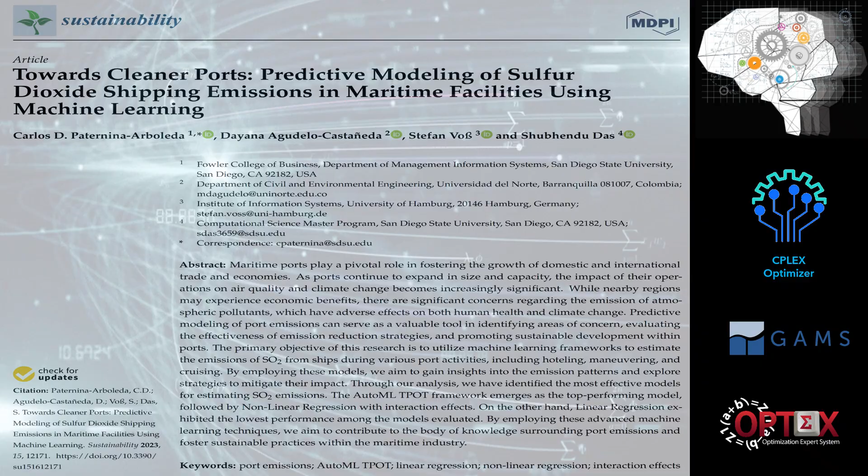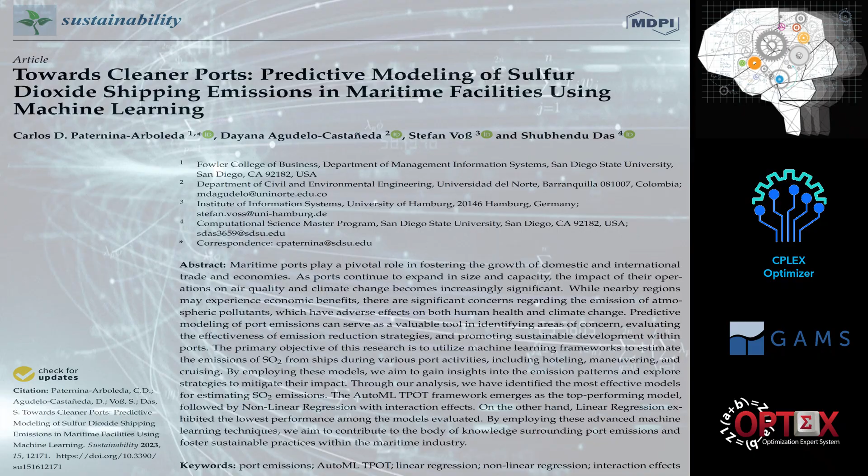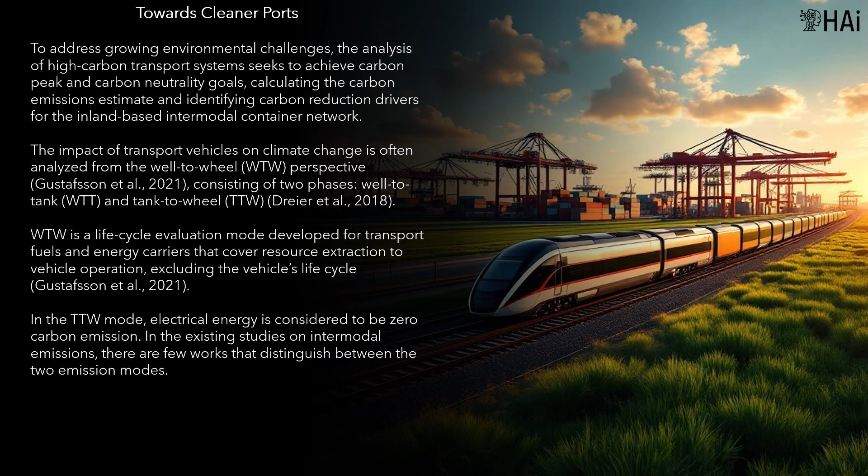Transshipment operations in intermodal terminals. The article, Modeling Carbon Emission Estimation for Hinterland-Based Container Intermodal Network, contains the case presented below. To address growing environmental challenges, the analysis of high-carbon transport systems seeks to achieve carbon peak and carbon neutrality goals, calculating the carbon emissions estimate and identifying carbon reduction drivers for the inland-based intermodal container network.

The impact of transport vehicles on climate change is often analyzed from the well-to-wheel (WTW) perspective, consisting of two phases: well-to-tank (WTT) and tank-to-wheel (TTW). WTW is a life cycle evaluation mode developed for transport fuels and energy carriers that cover resource extraction to vehicle operation, excluding the vehicle's life cycle. In the TTW mode, electrical energy is estimated to be zero carbon emission. In the existing studies on intermodal emissions, there are few works that distinguish between the two emission modes.

Well-to-wheel (WTW) and tank-to-wheel (TTW). Taking the port of Shanghai and the Yangtze River Delta as a case, carbon emissions from the last 10 years are used for well-to-wheel and tank-to-wheel modes.

The critical factors that drive sensitivity analysis and the variation of carbon emissions in different scenarios with carbon reduction policies are identified. The results indicate that the transport structure and fuel choice significantly affect the reduction of grid emissions. In the current policy-based scenario, WTW mode peaks carbon between 2030 and 2035, while TTW mode peaks earlier.

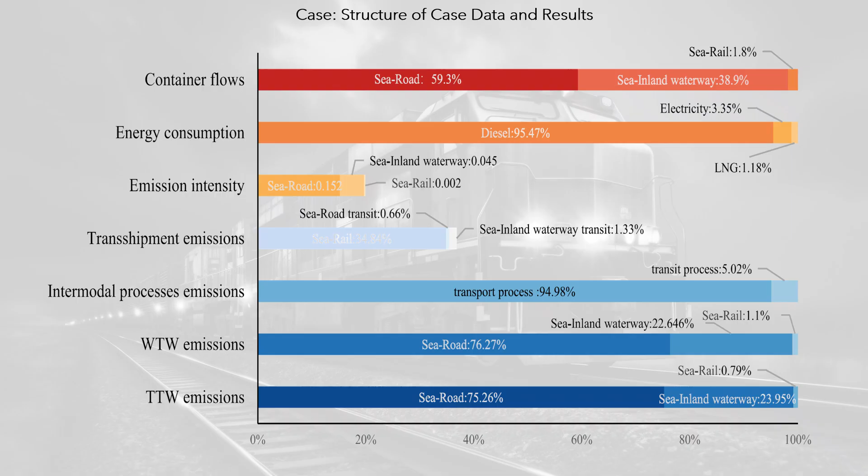First, global capacity shortage. Capacity shortages are evident in many of the container terminals at major seaports. Some of the main reasons for this are the continuous increase in the number of containers around the world and the increase in the size of ships in both production and use.

Other reasons are the export of products manufactured by China between multiple regions, the trend towards moving production facilities to low-cost countries, and the impact of rising GDP levels on the volume of world trade. All these factors, individually and in combination, contribute to the problem of capacity shortages, and this has many consequences.

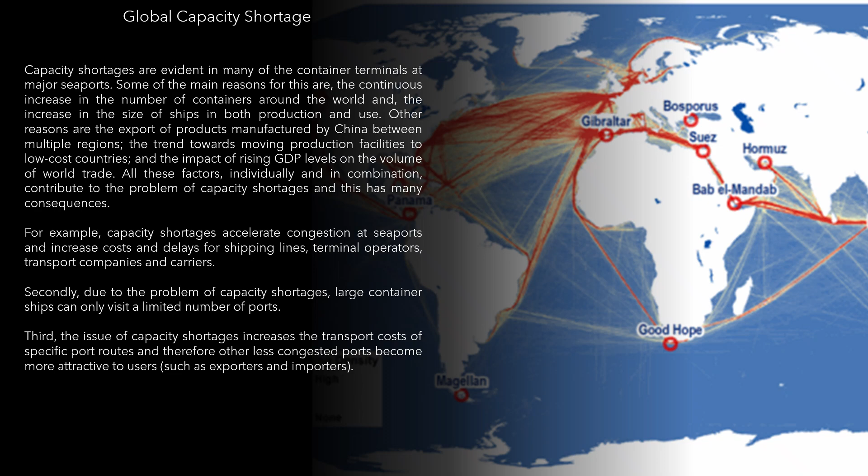For example, capacity shortages accelerate congestion at seaports and increase costs and delays for shipping lines, terminal operators, transport companies and carriers. Secondly, due to the problem of capacity shortages, large container ships can only visit a limited number of ports. Third, the issue of capacity shortages increases the transport costs of specific port routes, and therefore other less congested ports become more attractive to users.

Second, customer value. In a customer-driven market, the focus is primarily on the perceived customer value of the entire relationship with a company rather than on the product or service. Supply chain management is naturally an important component of meeting customer needs and providing value.

The importance of customer value is one of the main research agendas, and the role of the client in maintaining a long-term relationship between the chain of partners has been investigated, in some industries, such as the pharmaceutical supply chain. Customer value is an important factor in determining the type of supply chain needed to serve customers and the type of services to retain them.

A company seeking competitive advantage must clearly understand its customers' perceptions of value and the product attributes they demand. Perceptions of value differ between customer segments. Therefore, a company must identify the customer segments that are important to its long-term success and adjust its ability accordingly to deliver value to these segments.

Third, port pricing. The level and transparency of prices are decisive in the choice of supply chain and mode of transport by shippers. Port pricing structures are related to the cost of: one, port of call charges; two, freight handling fees; and three, congestion charges. The current practice of port pricing is based on a fairly linear structure and does not incorporate modern pricing tools, such as price differentiation or revenue management.

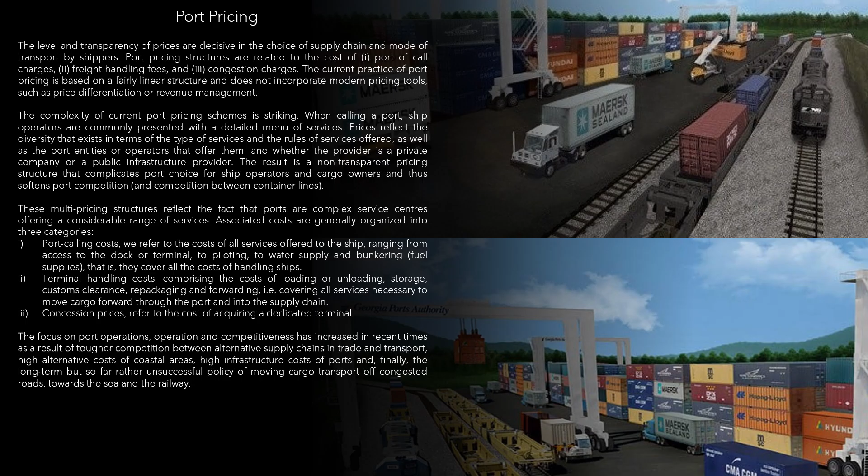Like Herbert Simon, Hypothalamus AI believes that computer-based mathematical modeling is the greatest invention of all time. Thank you for your attention.